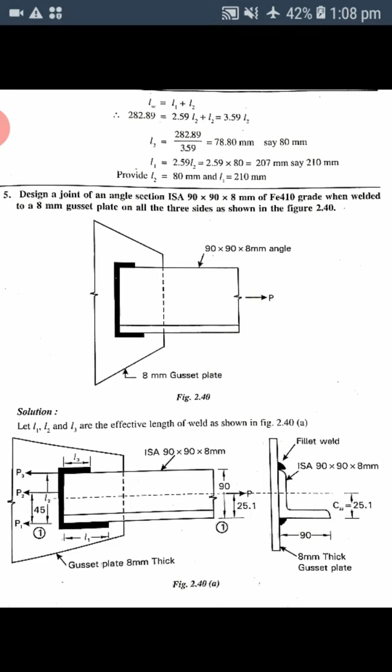Here the figure is given, the section is mentioned, and for this we need to design the weld. This is the section given, 90 by 90 by 8 mm, and this is the gusset plate. This section is joining the gusset plate through a weld, and the weld is applied on three sides.

This is side 1, 2 and 3 where the weld is applied, and for this load P we need to design the weld size as well as the length of the weld required. In this figure they have clearly mentioned that L1, L2 and L3 are the effective lengths of weld: this side length L1, this side L2, and this side L3.

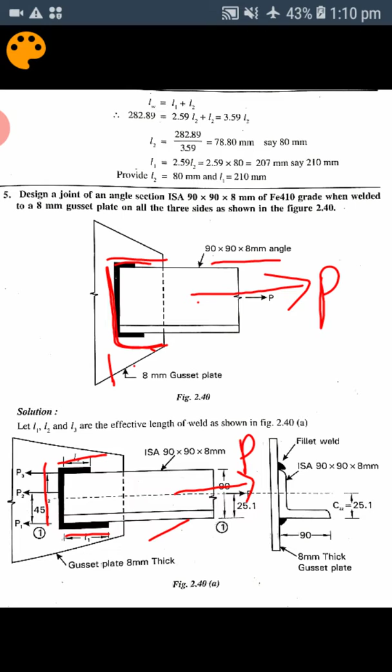We don't know L1, L2 and L3 yet; we need to calculate those lengths. Also the load P is given here, but actually it is to be calculated, because the load is not mentioned, but we need to calculate this load P. To transfer this P, what is the length of weld required?

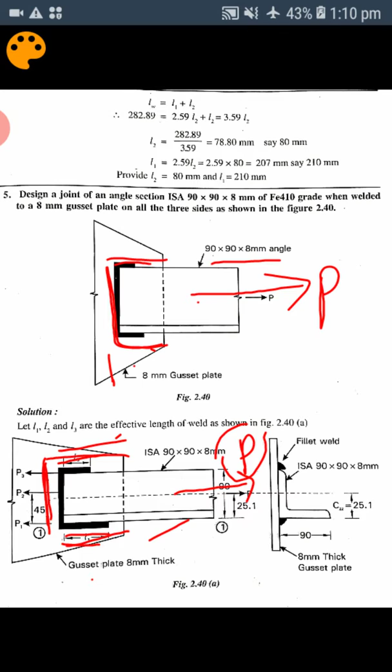So initially we are assuming this side length L1, this side length L2 and this side length L3. You may take them in any order, either this side L1, this side L3 and this side L2. So any order you may take. Here we are assuming this side L1, this side L2 and this side L3.

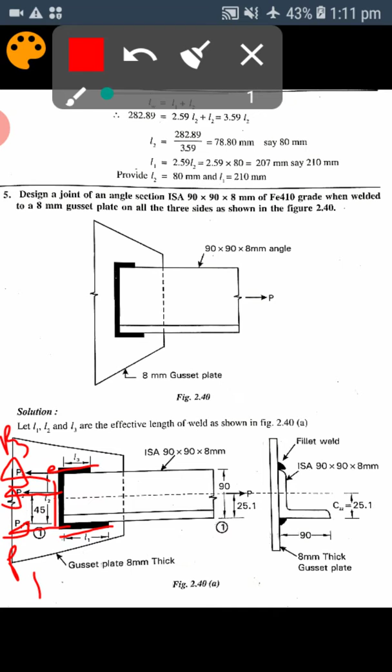Corresponding to length L1, the load transferring by this side will be P1. Corresponding to length L2, the load transferring by L2 will be P2. Corresponding to length L3, the load transferring by L3 will be P3. Then the total P will be P1 plus P2 plus P3. So these are the things we need to mark initially, and this is the section.

For the gusset plate, the angle section is joined, and here the weld is applied, and here the weld is applied. There is a fillet weld, and this is the angle section given. Mark the CG of the section, that is CXX, and you have to get this CXX from the steel table.

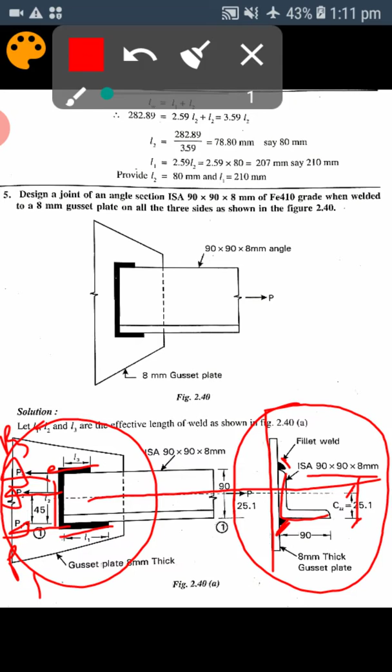Then, since the load is not given, the joint is designed for full strength of the member. The load is not given, so the joint is designed for the full strength of the member - this is very, very important here.

From the steel table or IS handbook, note down the properties of this section, that is 90 by 90 by 8 mm. From the steel table we take the area of the section, then take the CG of the section, that is CXX. Here it is shown as CZZ, but that's not correct - just make a correction, it is CXX.

After this, calculate the tensile capacity of the member, that is the full strength of the member, using this formula. Here Ag represents the gross area of the connected member, Fy is the yield stress of the member, gamma m0 is the partial safety factor for the material, that is 1.1, and Fy is 250. Substitute all values and you will get the tensile capacity of the member - this is the actual load which is acting.

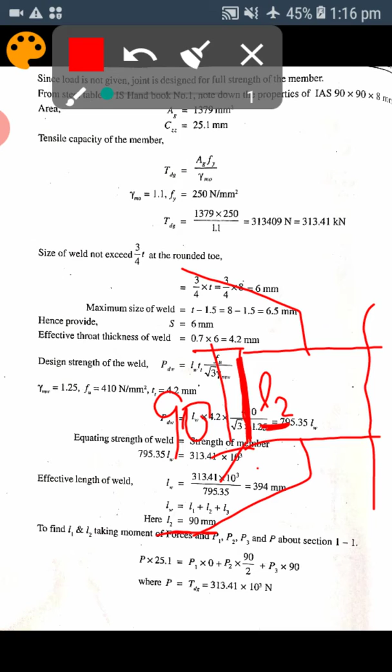Once we get L2 equal to 90, we have to get L1 and L3 by taking moments of forces P1, P2, P3 and P about section 1-1. To get L1 and L3, since we know length L2, and L3 and L1 are unknown, with P1, P2, P3 as the corresponding forces, we have to take the moment about the centroid. Once we take the moment about this centroid, we will get L1 and L3.

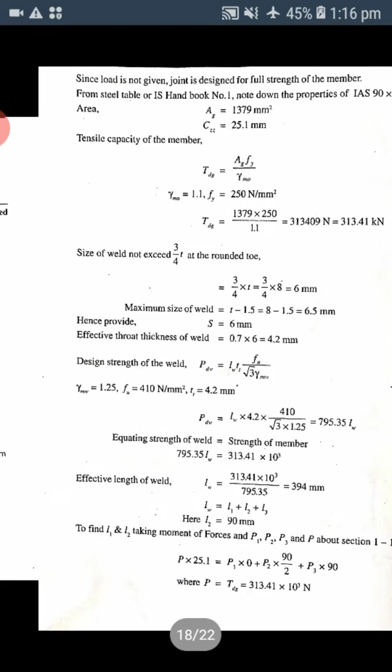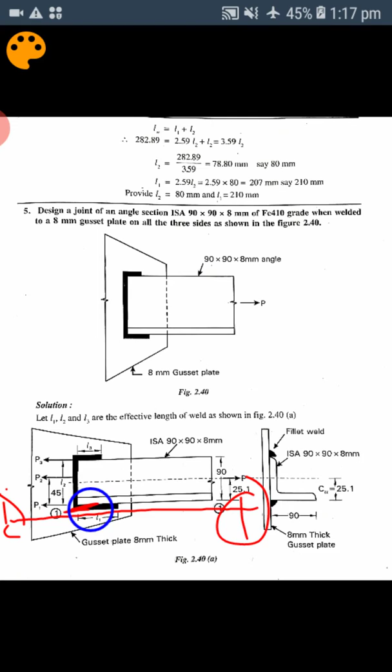Here they have taken P into 25.1 equal to P1 into 0, because P1 is passing through the moment center at section 1-1. So here they are taking this as the section. I'll mark it here - they are taking this section 1-1, because they are taking the moment about this. So this P1 passes through the moment center, P1 into 0, then you take P3 into this, then P2 into this. Here they've taken P into 25.1 equal to P1 into 0 plus P2 into 90 by 2 plus P3 into 90. Just take the moment about that section and you get this equation.

After that, you will be getting this one - P2, you will get P2 in terms of L2. Then you will also get P3 in terms of L3. Then you have to equate again, and you will have the equation as given above. Substitute all these things here, and after substituting you will get an L3 value. Just solve it and you will get L3.

Then LW equals L1 plus L2 plus L3. Out of this, you will know L2 and L3, then you can easily get L1. Then write L1, L2 and L3, and mark the same on the figure here.

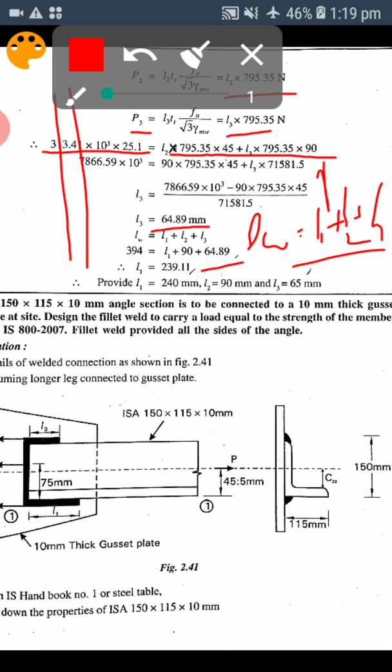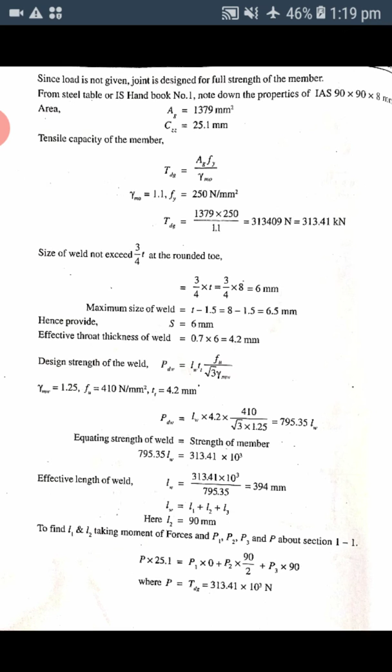So this is the procedure for how to calculate or design the weld for all three sides for the given load, or if the load is not given, we have to get that load for the full strength of the member using the formula. Then once we get the load, we need to design the length of the weld for that load. This is one more important problem, so please practice this kind of problem and solve it.